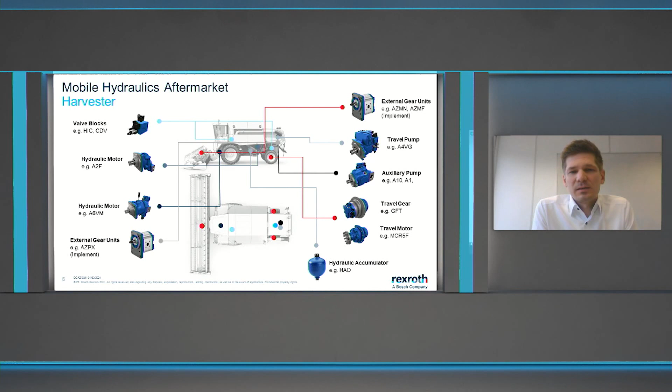Then if we go to the next slide, just a second example to look into the agricultural applications. So here we have a combine harvester, a very complex mobile machine, which also needs a lot of hydraulics to operate and drive the different functions. So for driving the vehicle itself, usually a hydrostatic transmission is used. It can be all kinds of different options.

Normally the front wheels are driven, so an axial piston pump closed loop system is used in combination either with axial piston motors and gear units, or also, and that's also the case if we have then a four-wheel drive on the rear wheels, radial piston motors, for example. But what we also find are then motors, variable or fixed motors assembled in an axle, which is then driving the wheels.

And the different functionalities of the vehicle, such as the rotation in the platform, where hydraulic motors are used, but also the feeder, the axial rotor, all of those are operated by hydraulics, and special functionalities, such as preventing the platform in the front from bumping. Then hydraulic accumulators, for example, are used to compensate such oscillations.

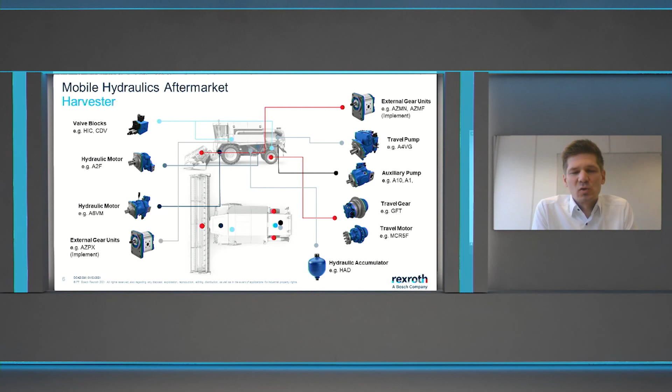So this is just to give you a bit of an impression, if you are not familiar with such kind of machines, how much hydraulics are used in mobile machinery, and then how important it is definitely also to keep these machines running, to keep the hydraulics running, and therefore our service and service offerings are of course mandatory.

So if we go to the next slide, I would like to explain to you what our service offerings are. So first of all, if you look into this market that I just explained, with the many different industries that we find there, the different applications and different machines, this market is extremely fragmented. We find customers that are using just one machine, up to big machine-owning companies with a huge fleet.

I talk here about the mines that I mentioned already, but also big construction equipment rental companies, or airports or harbors, for example. So these kinds of machine owners or machine users can get the services, the spare parts and the replacement products from different sources. Our major goal definitely is, and this is very important, that our original components are used. No matter if you receive these through the OEMs, which are producing the machines and are able to provide also spare units, for example, but also the possibility to get these services and additional support from our certified service partners, as well as from Bosch Rexroth regionally and also globally directly.

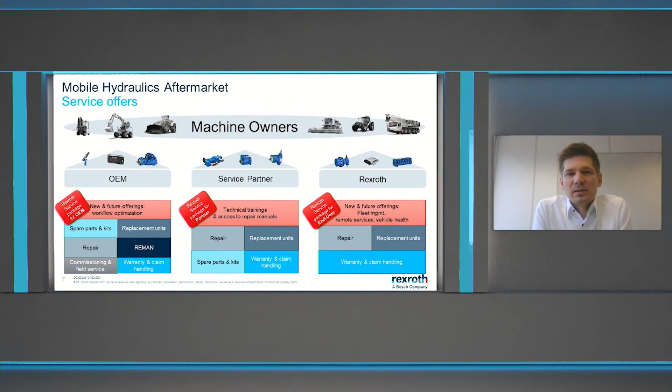So as you see, there is a big portfolio of service offerings that we have for the market. And for us, again, it would be important that you pick Bosch Rexroth as a supplier, that you choose the original, because the original ensures that your vehicle will always run with the right performance and with a long lifetime. And to look into this topic a little bit deeper, we can go to the next slide.

And on this slide, I'm telling you the most important things about original components and why this is so important. One topic definitely, compared to any other suppliers for our components, is that we ensure that you're always getting very high quality. So what does that mean? First of all, we are using the defined and right material for the components to ensure that the components last as expected.

Also that these spare parts are manufactured with the right tolerances, so that they can interact with each other in a pump, for example, in a good and efficient way. And also, all of the spare parts that we provide to the aftermarket are manufactured in our series production with our series production processes. Reliability is a very important topic. So what does that mean?

First of all, you need to be able to identify the component which needs to be repaired or replaced correctly, and to know which are the right spare parts, the latest spare parts that have to be used for repair. To give you an example, we have product families that we have been supplying to the market for many, many years, but there might be upgrades coming from time to time. And for repaired components, we ensure that if we or our service partners repair these components, they always use the latest, newest spare parts, which always ensure the highest lifetime and the best operation.

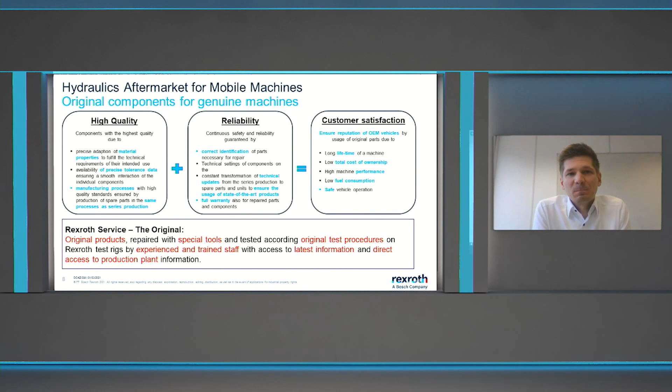So if we go to the next slide, I want to point out one last important topic for us in the aftermarket. Please switch to the next slide.

Thank you. So as I mentioned before, to be able to provide all our service offerings to every one of you, to every machine owner, we rely strongly on our certified service partners. These partners get access to all the necessary trainings so they are able to qualify their staff, know our components, know how to find defects and understand what needs to be repaired, and they get access to special tooling, which usually only we have at Bosch Rexroth, but which we share with our service partners, ensuring they have the test rigs to test the components and access to all the technical information I just mentioned.

Not only do they ensure that they supply only original components, but they know exactly which are the right components and the right technical settings. And it has been a really great message for me in the last year, and I'm very proud that we managed to establish our first certified mobile hydraulic service partner in the ASEAN region with the company Anda Hydraulics.

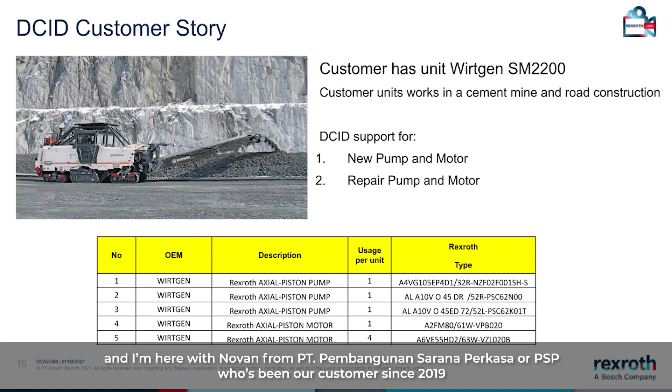Hi Novan, how are you doing? Hi Arka, I'm great, thank you. Staying healthy, I hope? Yeah, or I would not be here talking to you. Yes, thank you for agreeing to speak with us today. Do you want to tell us a little bit about PSP?

Sure, PT Pembangunan Sarana Perkasa is a contractor in cement mining. Our solutions are more into cutting the rock. We have 12 units of Wirtgen surface miners in our operation in Java and Sumatra, Indonesia.

Blasting is a requirement in cement mining, isn't it? Yes, but unfortunately the country's conditions have made it more challenging to do that because of the impact to the environment and the cities. Okay, why did you choose Bosch Rexroth as your business partner?

Bosch Rexroth is a globally known brand for quality. The commitment in delivery, on-site support, and warranty is also commendable. To date, what benefit have you had after working with Bosch Rexroth? We have enjoyed warranty claims of 3,000 hours a year and good prices.

And how do you think Bosch Rexroth supports new motors and new pumps? The support has been excellent. I was pleased to learn that Bosch Rexroth agreed to air freight the product we required urgently to cut down lead time.

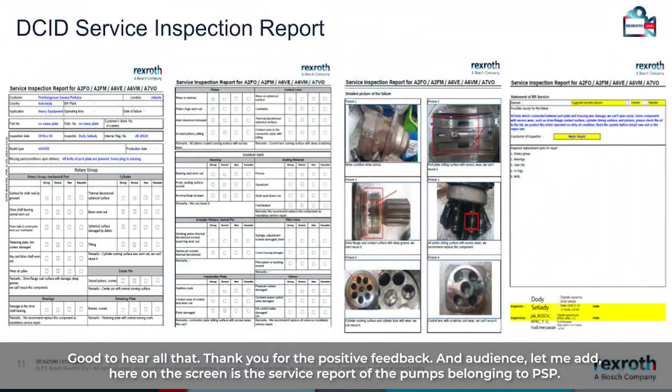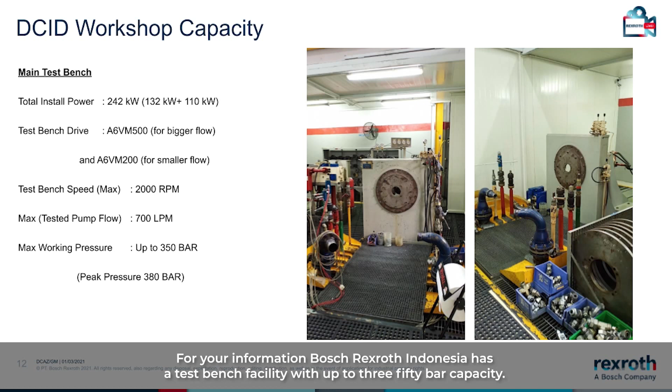Audience, let me add here on the screen a service report for the pumps belonging to PSP. We list the real condition of the pumps upon inspection and work out with PSP for the best solution. For your information, Bosch Rexroth Indonesia has a test bench facility with up to 350 bars capacity. We are also able to test valves and small cylinders. Our workshop facility has a 3.2-ton overhead crane, washing machine, and painting booth.

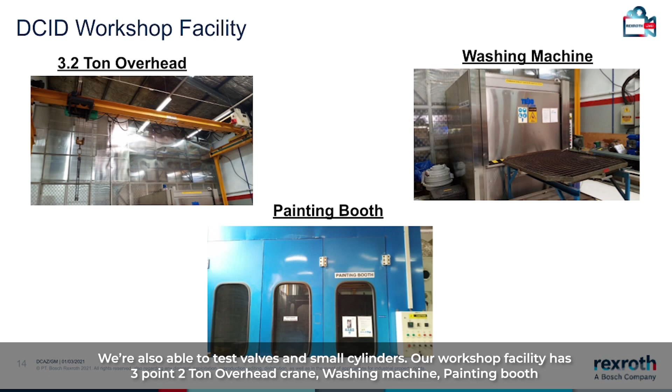That's all we have today. Thank you for joining us. Thank you, Novan. Thank you all. Bye-bye.

That was a very interesting presentation from Chris Lip, Arka, and Novan from PT Pembangunan Sarana Perkasa. Audience, if you have any questions for any of these two gentlemen, please go to the Q&A section and type your questions there. I'm afraid Mas Novan is not here, do you mind, Arka, if I'm the one talking to you right now? Gentlemen, I must say I learned something new from your presentation earlier. But if you don't mind me asking Chris, where in ASEAN and Oceania is your biggest market for mobile aftermarket?

I mentioned in my presentation that we have a huge market for the mining industry with all kinds of different mobile machines in it. So in ASEAN, definitely it's Indonesia, but as I also said in the beginning when introducing the machines, the Australian market is also big for us. But this does not mean that other countries are not interesting. We have so many machines operating in Vietnam, Thailand, and also other countries. In Malaysia, for example, I didn't mention Malaysia, where we also have different kinds of construction equipment running, as well as Singapore and the Philippines. I could mention everything, but your question was which is the biggest, and this I would say definitely is Indonesia and Australia.

Hello everyone, my name is Marc Wucherer from Rexroth. As you know, we keep our customers competitive. In 2019, many great things happened - too many to mention, but I want to share some highlights. We help our customers operate with more power, more efficiency, more intelligence, and more safety. They can count on us. As a company, we say, we move, you win.

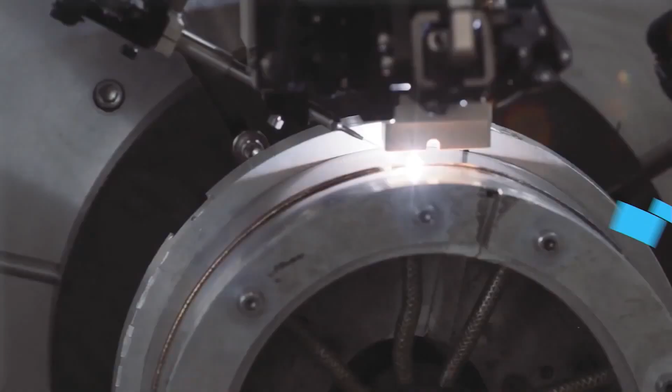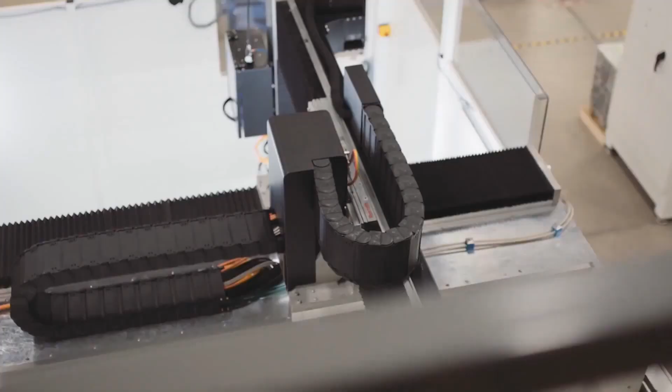Let's look at the first highlight. Last year, we could greatly increase the efficiency of the operations of Liburdi Automation. Liburdi is a global leader in automated welding systems, typically working within the aerospace and medical community, which requires high tolerance, high precision machines. We chose Bosch Rexroth as the individual vendor because of quality, on-time delivery, and engineering services that could provide us with the unique challenges we see at Liburdi with our systems.

We also like to give our customers some extra power. So let's check out this video from Ferrari Sugar Mill in Brazil.

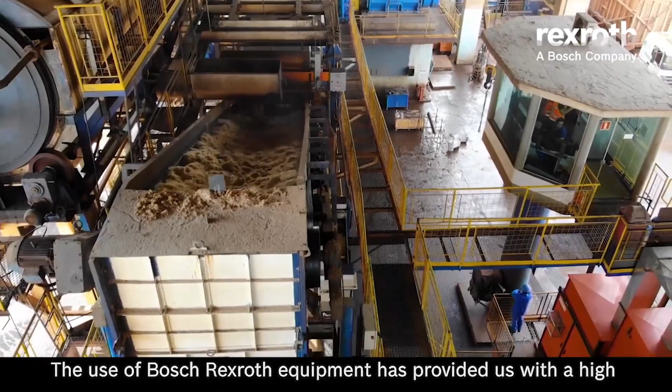There is always something going on in our innovation lab at Ulm. Look at it.

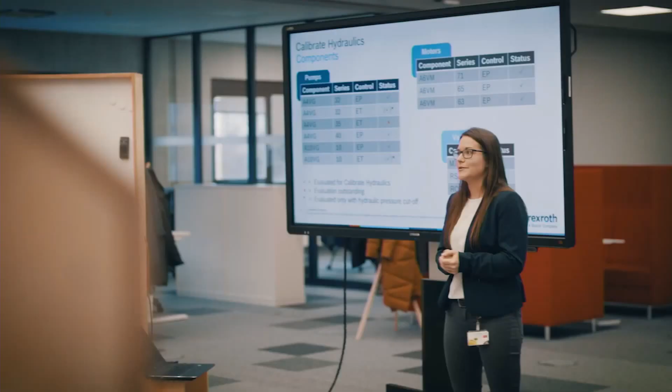Last year, we met our customers and partners at a number of events to show our latest innovations and to start the dialogue. Let's share some examples.

Here we go, the Hannover Fair. We joined the Hannover Fair with our Rexroth Live concept. Shall we have a look at it? Let's start. Here they are. As you see, this is no ordinary floor - it's a visionary, intelligent floor.

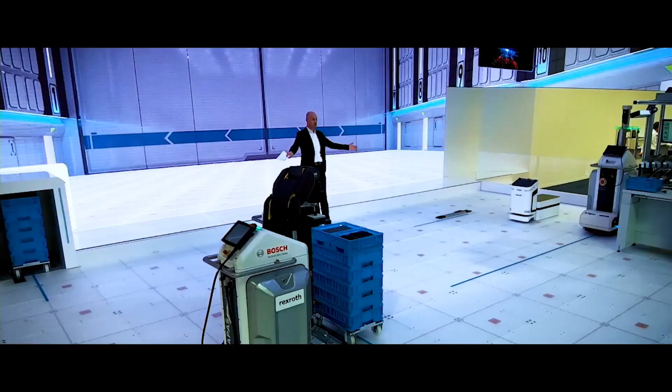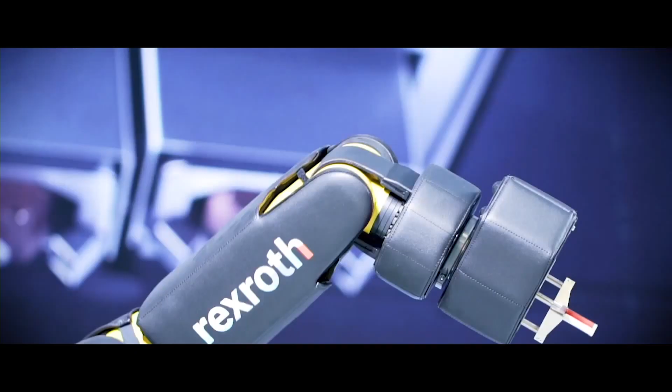Super, let's check the next one. We are very proud of it - Bauma, the biggest fair of construction machinery. Let's check it out.

Take the next one - of course, SPS, where we introduced to the world our new control platform, ctrlX, the heart of factory automation. Let's have a look.

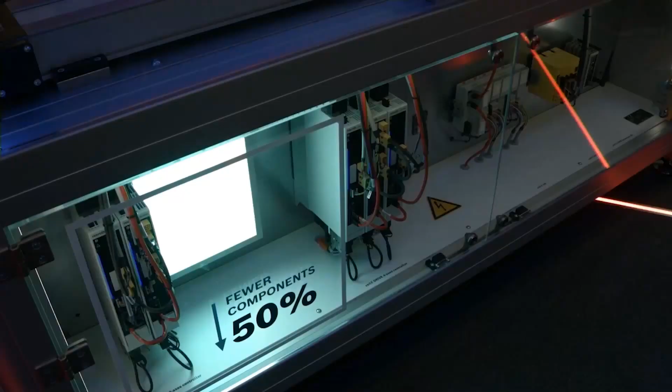This is automation. Let's check out, of course, last but not least, the IAS in Shanghai, where we brought our enablers. Let's see how they performed.

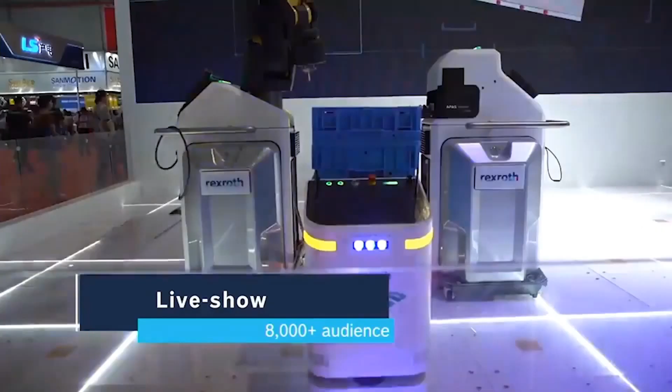Back to our customers. When it comes to intelligence, we are your partner. Let's see what Soitec says about it.

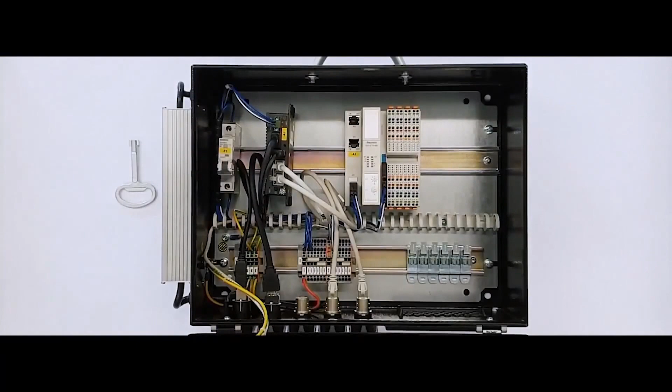Hi everybody, my name is Emanuele Montigiani. Communicating with a high-level machine architecture, IoT Gateway is the physical element for the digital integration of the industrial world.

At Rexroth we think safety is crucial. We help LafargeHolcim by predicting the required maintenance.

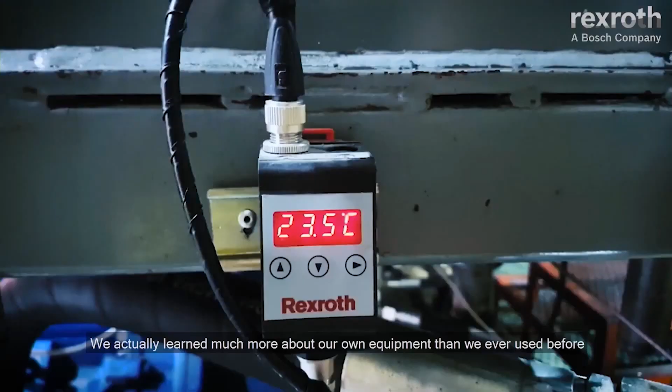Since we've actually put that in, it's been a journey, a learning journey for us as well. We actually learned much more about our own equipment than we ever used before. If there's something coming, or we can see some change in values, or the pressure is rising in the clogging indicators or something like that, we inform the customer that the filter has to be changed.

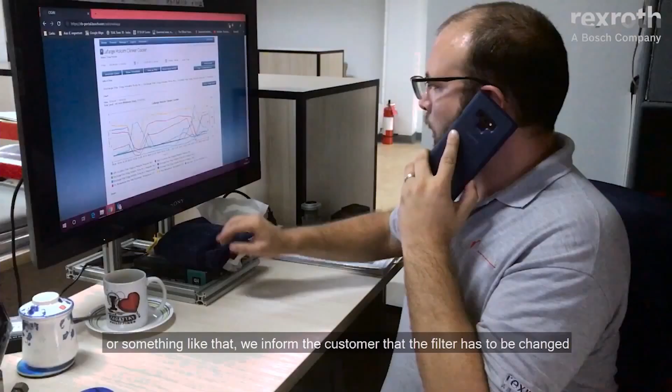Too bad I cannot show you every highlight, but I hope this gave you an impression of what we did last year.

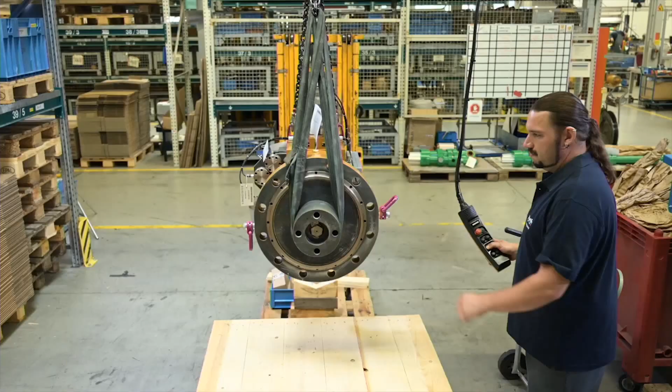The digital service assistant helps you to repair your system easily, smart and quickly, and reduces downtime. Let's take a look at the features.

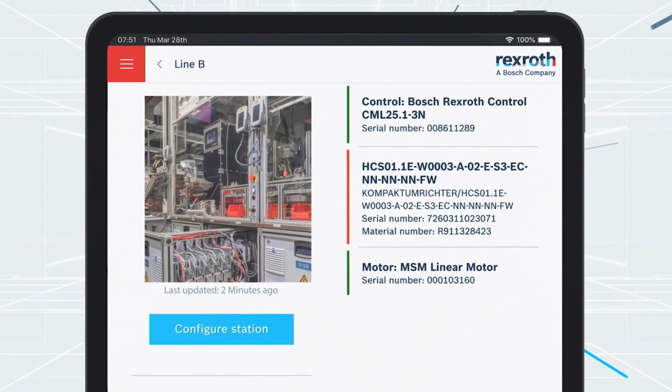Online diagnosis: in case of a malfunction, the simplest resolution is online diagnosis. This enables you to access the machine's Bosch Rexroth control unit directly via wireless LAN and identify the problem.

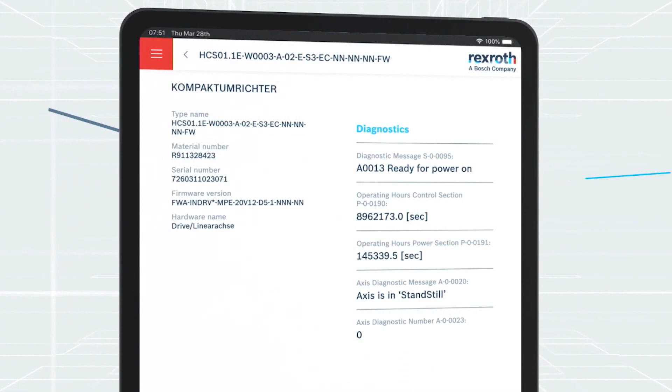The electronic nameplates give detailed information about the installed components. With the help of a color marking system, you'll be able to immediately identify the defective components. All necessary data and information, such as serial numbers and the displayed parameters, can be found. You can then request the appropriate service.

Service options: you can use the documentation button to select the components for which you need documentation. The service app takes you directly to the appropriate documentation, which you can also forward using a link.

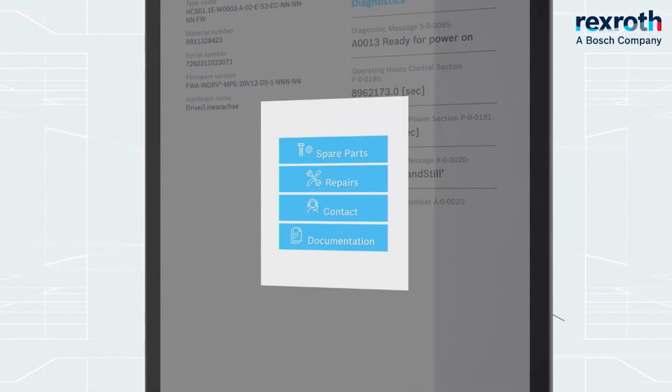You can quickly and easily reach Bosch Rexroth service by using the contact button. You can also call the service hotline. If necessary, you can send relevant error data and photos directly to the specialist on the help desk. You have the option to attach the log file from the online diagnosis. You can also forward selected information to Bosch Rexroth service. A service employee will get in touch with you as quickly as possible.

In order to request a repair of your product, select Repairs. You can rank the urgency of your need here. A member of the service team will get in touch as quickly as possible.

Spare parts can be ordered easily and directly as well. You can use the code scanner if you have already removed components from the machine. This process enables you to identify every Rexroth product no matter which code type is shown.

With the Select Components option, you can make selections from the available list of components and register the product at Bosch Rexroth or add new components. The code scanner is used for this process. As an alternative, you can also manually enter the code.